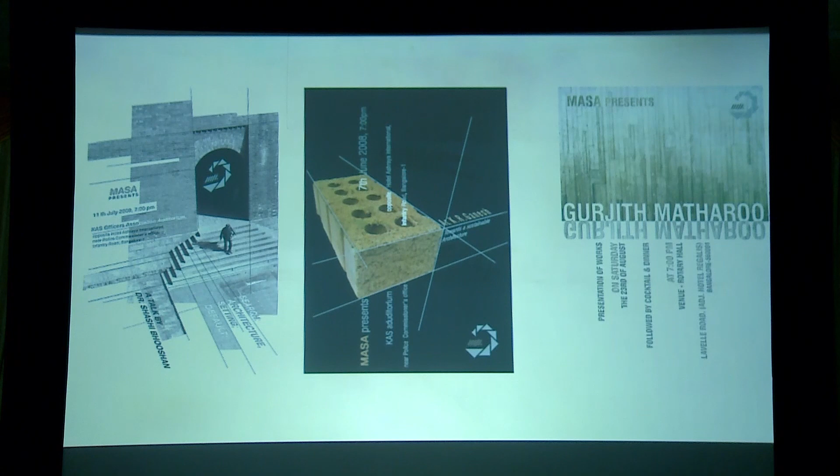Most of the early practices or presentations were from people mostly in and around Bangalore, and some here and there where we could manage to get them from within the country, mostly South India or a little beyond South India.

So these monthly events would then terminate into what was called an annual event. The annual event would have speakers brought from other parts of the country, and that would be a day-long event. So the first one was when we all met, the second one was this.

Then a series of monthly events with speakers, mostly from within the country. As events went by, people from Ahmedabad, Delhi, Bombay, wherever you'd find someone interesting or doing interesting work would be called, and nobody so far has refused. People would change dates at most, saying not this month, next month, but nobody ever said point blank that they wouldn't be able to do it. That led to a series of annual events, and the format kind of got set.

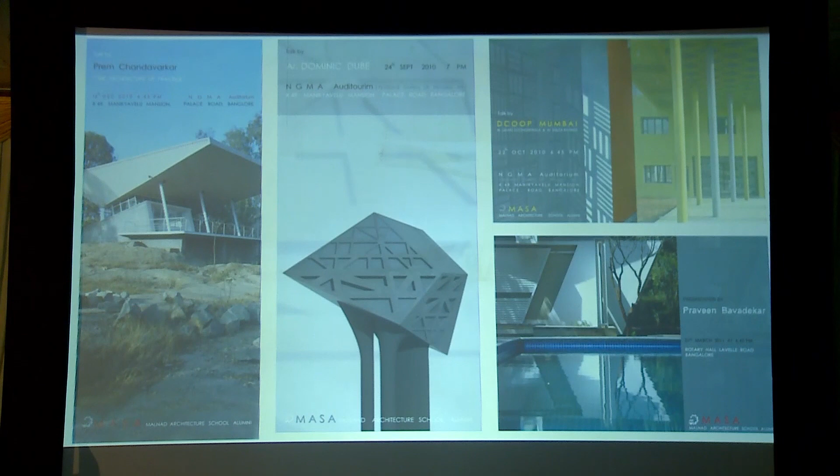You had events which happened every month, and one at the end of the year, September, October mostly, where you'd bring in speakers from around the globe. Slowly we became more adventurous, saying okay, now that we've done events within the country with speakers mostly from the country, can we start hunting for speakers globally? The idea was to start getting speakers from anywhere in the world for the annual event at least, so you'd get the best for the rest of us.

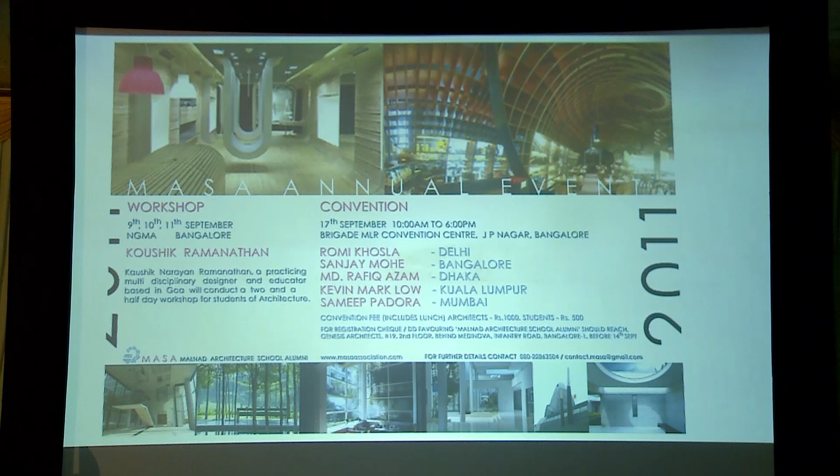This led to getting people from mostly Southeast Asia, because the context was to find people working in similar circumstances, facing similar challenges, having the same weather conditions if you'd call it that, and something which would inspire the rest of us to look at that work and see inspiration in it which would hopefully inform our own practices.

This happened continuously, and some of the speakers we brought were probably introduced to India for the first time. The most interesting part of finding speakers from abroad sounds silly if you look at it now - one would pick these names out of the internet or wherever and just give a cold call. Just write a blank mail to the office saying we are an association, we are doing this, and would you mind coming and presenting? And you won't believe it, most of the speakers have come like that. Nobody has asked for references, nobody has asked if you know somebody who knows somebody. Most of them have come on cold calls, purely randomly picked out of the net, hunted, checked out the kind of work, and then people have come.

For example, Peter Rich, when he first came to Masa, he was visiting India for the first time, and he's not gone back home since. He's still here.

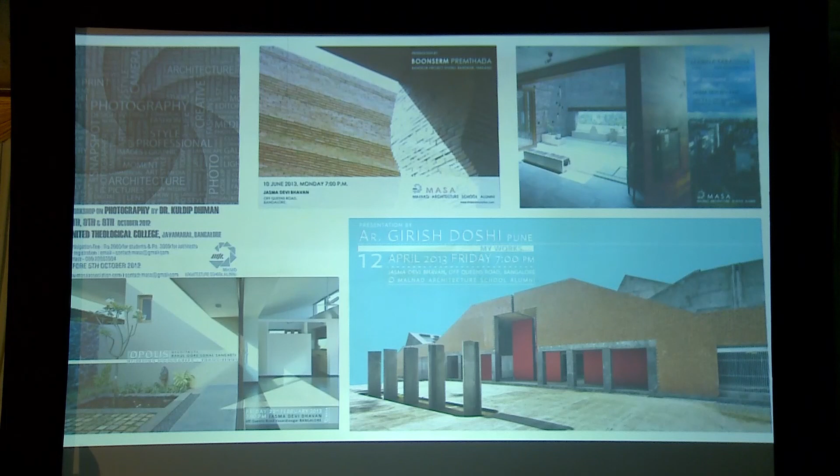People from Spain, from mostly the Middle East, Beirut, Jordan, Amman - countries and practices which have similar challenges like ours, where you work with tight budgets, constraints of programs, constraints of land, and situations which force you to make very difficult decisions, which at the same time produce this amazingly creative work.

Must thank an intern and subsequently an architect who's now running his own practice, a guy called Aziz, who helped doing these wonderful posters and handouts every year, and people would treasure these handouts which would go out every year.

So we did our last event in August 2019, Mona Doctor-Pingel from Auroville, and after that, one of the biggest events which happened during that period was SANAA, one of the Pritzker Prize awardees - I think the only Pritzker Prize awardee who has presented in Bangalore.

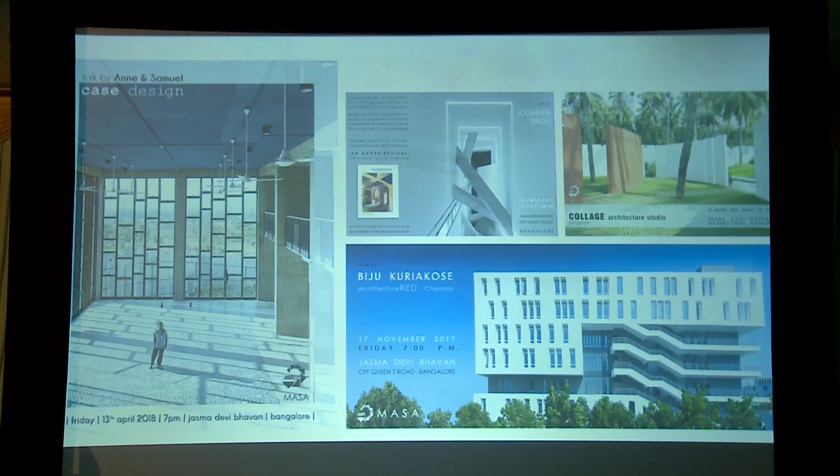Francis D.K. Ching, all of you know from your college days - Form, Space and Order is a book I don't think anybody's ever forgotten. He was somebody we had to pursue quite a bit. It almost took 3-4 years of continuous writing letters to him before he finally agreed to come, and it was a wonderful trip when he finally landed up.

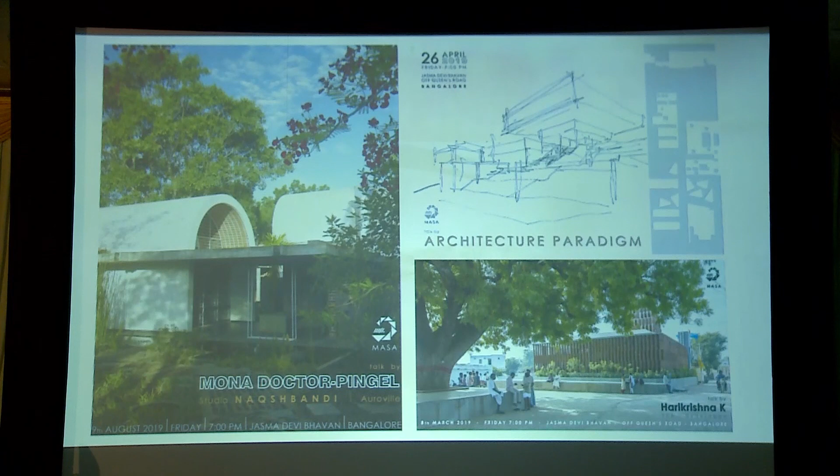This was the last annual event, 2018, and then monthly events followed after that, the last one being Mona Doctor-Pingel. So now, post-COVID and post-Netflix and the rest of it, we'd also like to call it the end of season 1. Season 1 closes with 11 annual events, 90 monthly events, and featuring about 135 speakers from around the world. This is the beginning of season 2.

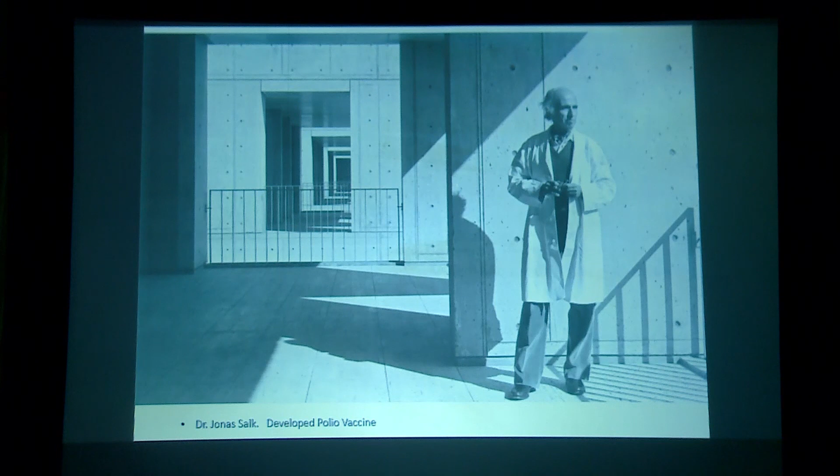Now, this is Dr. Salk, and you all know about the Salk Institute. But I came across this write-up which he had written, what he gave to Louis Kahn. And this is really an amazing write-up. It says: desirability of making a place not only for the scientist, but a place where I would like to invite Picasso, to have the presence of the unmeasurable, which is the realm of an artist. This is the language of a god. Science finds what is already there, but the artist makes what is not there. Now this is quite amazing, and after this, Kahn does this, which all of us know about, and all of us have got inspired by this work.

Now something similar I saw at the Tata Management Center in Pune. We had gone there to see a memorial. Before we did the Anji Reddy Memorial, we went and saw J.R.D. Tata's collection—it's not a memorial, but a collection of his belongings and all.

And there is a huge archive where all the letters written right from Jamshedji Tata and all are preserved there. And there was this photograph, and there was a person who was taking us around. He told a story about it.

He says, when Jamshedji Tata saw iron ore being transported from India to London, to England, he said, if they take away grains, we can grow them back. But if they take iron ore, we lose it forever. So we have to do something to process it here. So the whole idea of putting up a steel plant came with the idea of doing something for the nation. It was not for making money, it was not for making steel, but it was a larger idea to keep steel within the country and then make something valuable out of it.

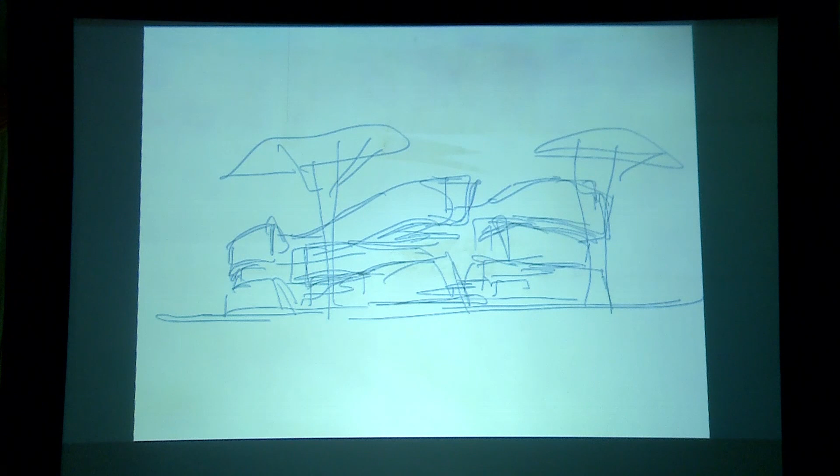And this is just one example, again Titan, of how the doodles turn into something different, then it goes a little further. Then you get into slightly more details, further details, and then a rendered image, and then the actual one. So this is a process which looks quite simple when we put it across, and it looks quite fun, it looks like a lot of fun.

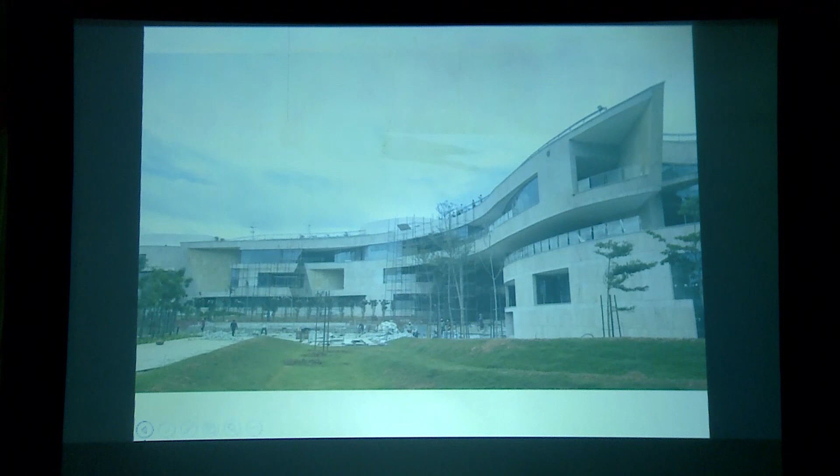But between every two stages, there's a lot of work, there's a lot of struggle. There's a lot of fight between clients, fight between structural designers, between, it's not a fight, but it's working together and trying to achieve that. So this entire process, it doesn't happen only like this, this is just a symbolic thing of showing us in terms of aesthetics. It happens at every level.

You work in plan, and you go through this struggle in the case of every detail. This goes on in every parameter, every level, as you move from abstraction to reality, trying to come as close as possible to what you are dreaming about. This is what happens when you really start coming closer to working drawings. You have this principal idea which you don't want to compromise on, you want to stick to it. But your ability to see through that and see these different layers is what makes the whole process different.

To understand the gravity, you have to understand the structure, you have to understand materiality, you have to understand technology, incorporating all services, statutory rules, economics, etc. There are so many more layers.

When you draw that initial sketch and fall in love with it and don't want to compromise, you still have to remember that a fire tender has to enter the premises, and if you don't make a place for it, your sketch will get rejected even if you work on it till the end. So being aware of all these aspects, working it through, and coming back with something powerful is what we all struggle to achieve. Whether we achieve it or not is a different thing, but at least we dream about it.

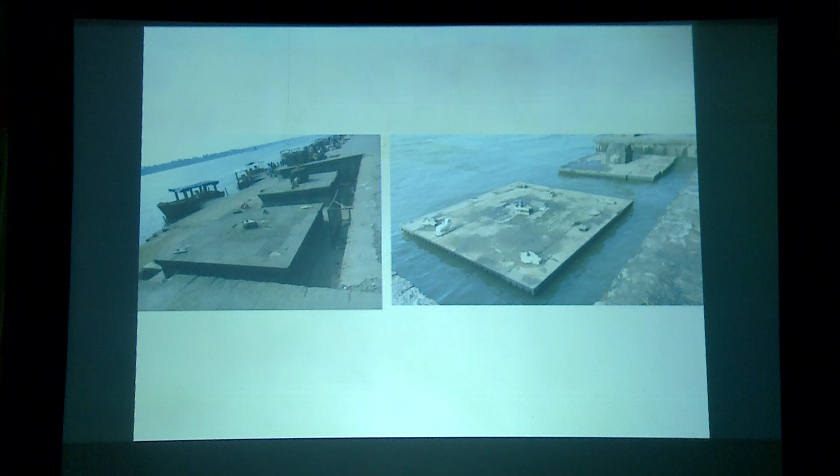And this is how one has to know how architecture has to deal with nature, to be able to absorb and still do something wonderful. And this is what we have to learn, I think. And that idea of dealing with water, this is Geoffrey Bawa's resort.

And here, the water level and the floor level is almost same. And at least for me, it took me so many years to realize the importance of elevating that water level, how important that water level is. If it goes down by 6 inches, it looks totally different.

Now, this is Karunashraya, which we had done long back. Actually, Medappa worked on it. And Medappa has done a wonderful extension to it recently. But just this picture was taken by Claire some time back. But just when the water level lifts up by 6 inches, it makes a difference. And then you start realizing how important it is to deal with it.

So this is one of the houses in Hyderabad where the water level goes below these platforms. But we did this another one where the floor level and water level is almost same. And it has a different quality altogether. So I'm going to show this house.

So this house is, people worked on this is Yatindra and Meera. Interiors were done by Kanan and Kanan Modi, and our Kanan Bangalore has done landscape. So this is next to this memorial what we had done. Actually, this is a house which was there behind that.

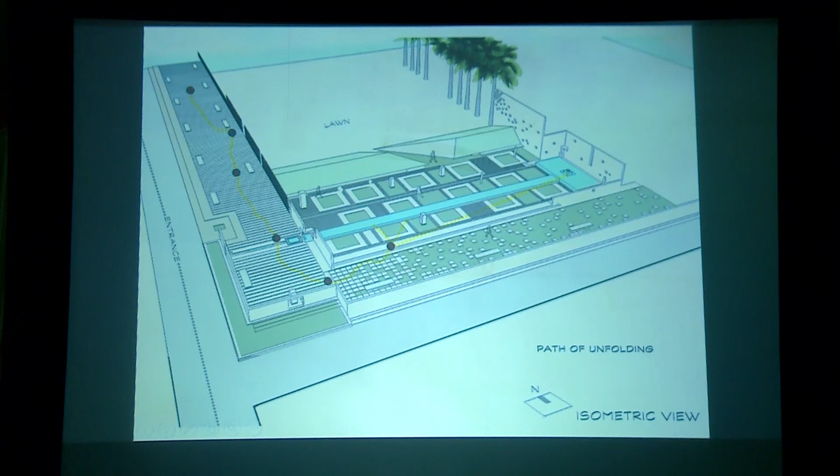Avinash has worked on it. He's sitting here somewhere. So this is what you get a glimpse of, that gap.

Just quickly go through. This is the path that you see, with that variation from rough to semi-rough to smooth to the grass and the tree at the end. That is the bike and the path that he used to take when he was young. That's the water going across. This is that car, which is one of the first cars.

So when young scientists walk on this path, they know that both the ends show what you can do with your life. It's about showing, starting small, taking people along, and then finally this becomes part of these trees, and it becomes part of nature, and then connects with the stars around.

That's a void, maybe a smaller scale compared to what happens in ground zero. But you don't see the base of it, and his philanthropic thing, it gives away, the water flows out of it. Your eye level comes lower, so you just see the sheet of water. That's about giving. That's the path. That's the tree, and this is where. This is the farmhouse, which is just behind that.

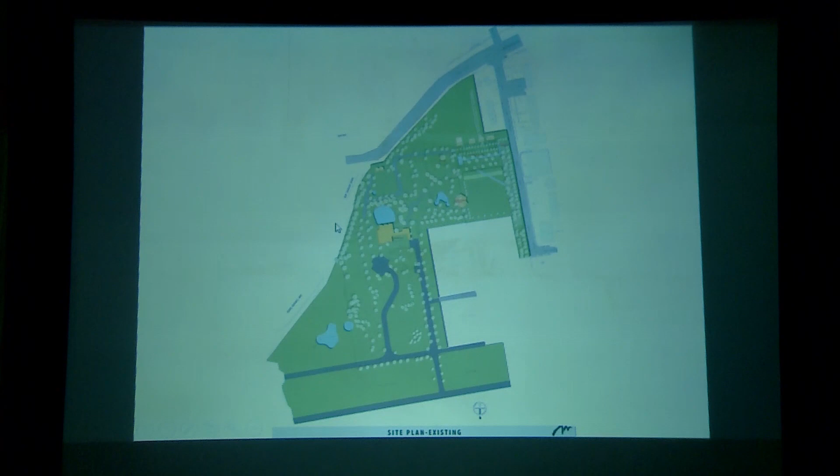So that's the memorial, that's the path which would come, and this is how the front area looks like. There was this cluster of trees we were trying to work with, as you see, there is one very nice kind of dried tree which was almost sculptural. So you have this one large open area here, another large area here. So you drive through this, come into that area, and eventually one can walk to that memorial place.

This was one strong focal point. There were some apartments here, slightly taller structures, so we wanted our entire house to sort of focus towards that to maintain privacy. So that's how you come in from the memorial side. This is how the house sits in, just a series of parallel walls.

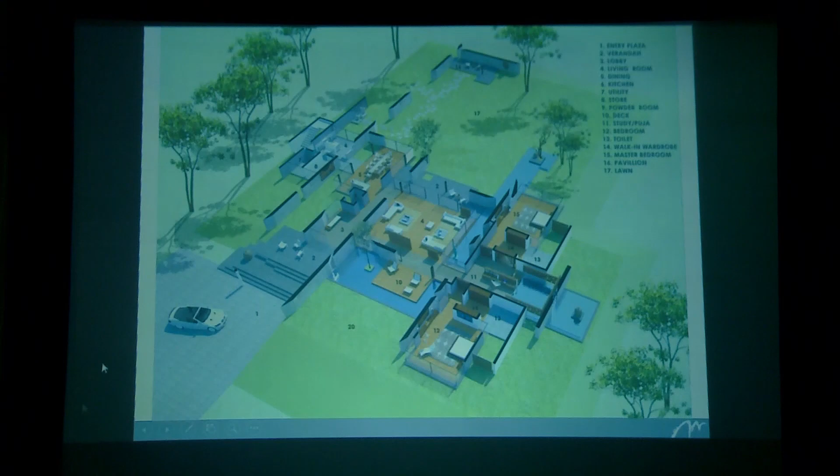Now, all these years we have been always doing houses with multiple levels for some reason. Unless you have a few steps in the house, we never felt comfortable. But this house, there was a requirement right from the beginning that it has to be at one level, and then no double heights, no triple heights, so that was one more challenge.

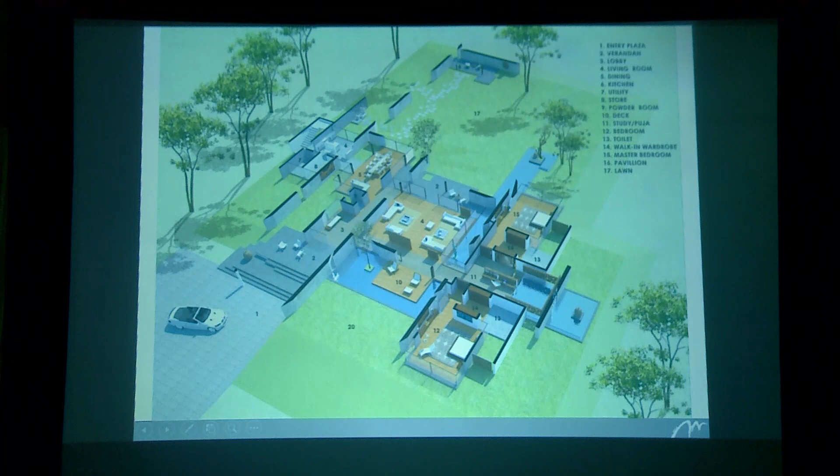We were trying to bring nature into the house, and it had to be air conditioned because Hyderabad is 40 degrees in the summer, so it had to be enclosed. We couldn't create internal courtyards, but we created these layers through which water can come in, nature can come in, and that itself would create a play of light and shade. We wanted that dried tree to become like a sculpture, so that became a spot, but eventually that tree fell down and we had to change that.

So this is how the structure looks like. You walk from there, that's that Bodhi tree. These were a series of sketches earlier, we wanted to get glimpses of it. There was a debate about whether we should use the same stone here or do something different, so a series of slanting walls to basically shade the western sun from coming in. You still get glimpses of it, where the water, when you sit with a book on a chair or a bean bag somewhere here, you'd see that water coming in and get privacy. So what you see, this gap here, that water coming in is just behind that.

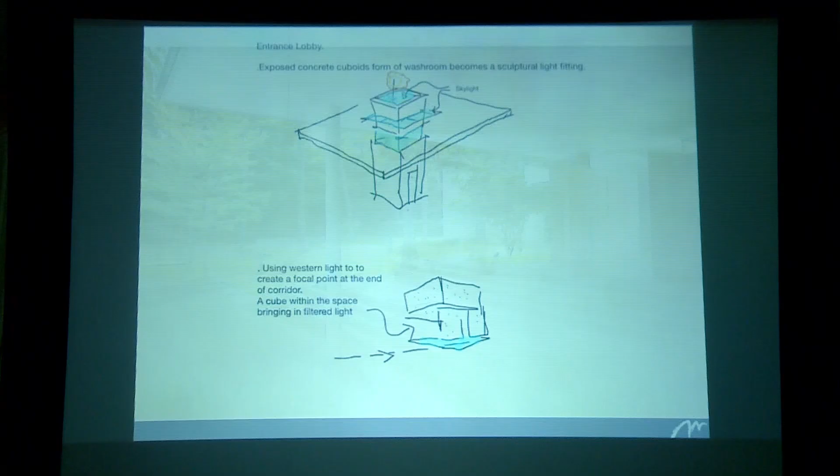The entry sequence, the focal point as a pavilion, so this is how you would enter. There's this powder room next to the reception, so we wanted to create something fun with the light, where we tried to use stone and exposed concrete. These are clusters of trees where your vision automatically moves, and then the way you would take water through these gaps.

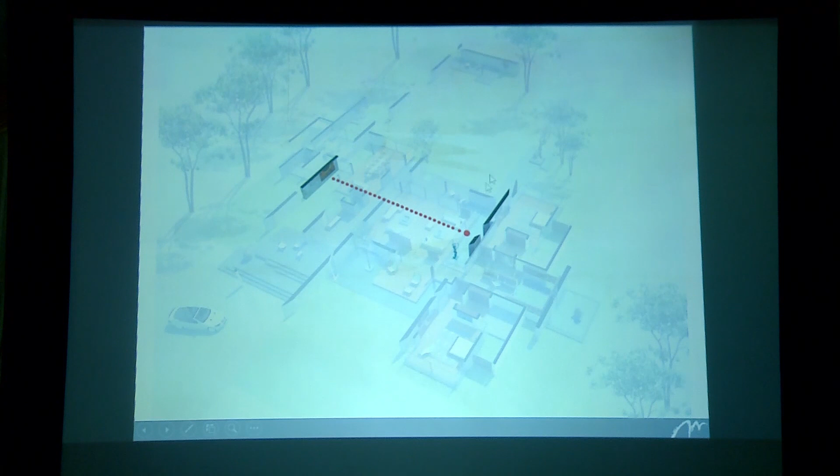This wall goes up to shade the western sun coming into this living room. And then this was a sculpture which Mr. Reddy had, so we just moved it here.

Trying to play with the light, trying to reflect light off certain planes, getting filtered light into it. We're trying to create these gaps in the ceiling which would come down as a slit on the wall, and again as a focal point you see that one slanting gap happening. So you have this series of focal points happening from one end to another, and I think we could only play with those

because there was no volume to play with, which was the language we were more comfortable with. So we had tried a lot of options here. Eventually this is what happened - some filtered light coming through. We wanted to see glimpses of the sculpture, so some openings and a reflected light happen at a lower level.

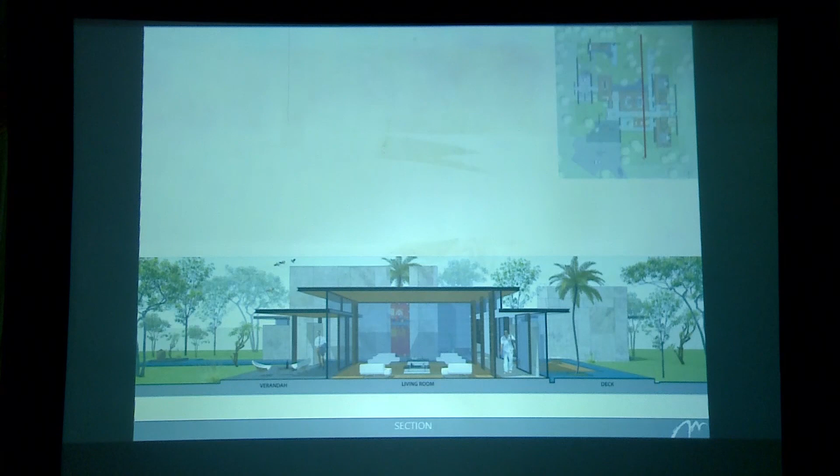The entrance, the other axis, just that black silky finish, stone with 3 different finishes, and then the similar stone used in the memorial but with a different texture, and using a few wooden things. So basically it was like a series of layers, creating different quality of light,

and trapping nature within the space. So Kannan did this landscape, it's very nice. And there's a swimming pool - earlier one had some abstract shape, which we made simpler.

Now this is a second project, in Bangalore, but it's a new campus. I was given some 100 acres of land. Since we were working on this Bangalore campus, they asked us to do one small management development center without affecting the larger thing, because eventually they had a kind of a competition - there was a different process of shortlisting big architects and all that. So that's a different story.

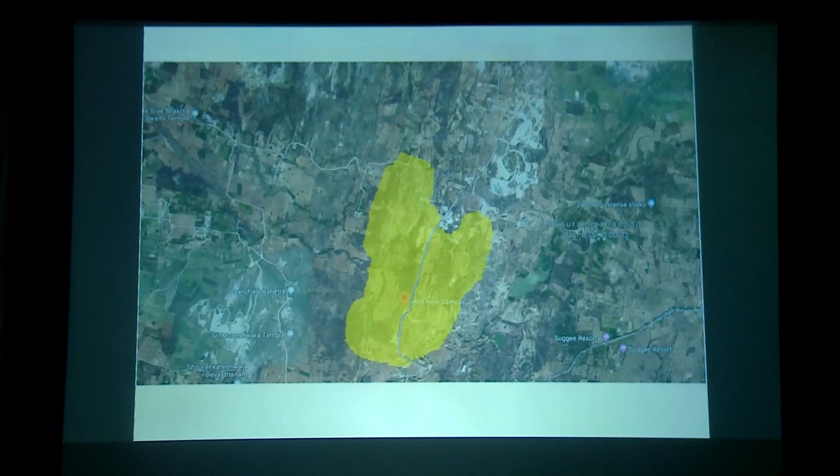Just 1 second, sorry. You can hear, no? Clear. Sorry. It's okay?

So the site has this amazing slope, and actually me and Medappa were in Mizoram about 1.5 months back, and every site is a sloping site there. So we went with our usual presentation - they wanted to see how to build on the slope, because that was the only problem they were facing. Every site was like, if you enter at a place, you have at least 3 floors below that.

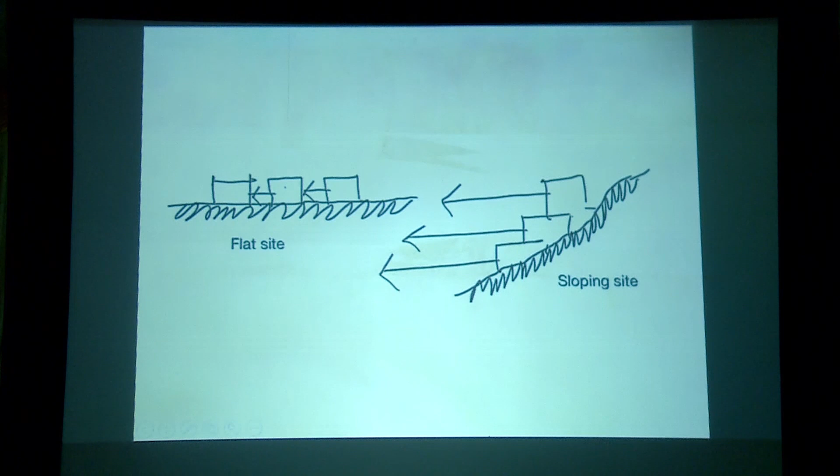So this presentation we had not taken there, but if you just compare a flat site against a sloping site, it has this tremendous advantage of lifting your eye level, so you can get a view right up to the horizon. You have access to the terrace of the lower person, so that's a huge advantage, and then you have access to the ground. So even if you are building 3, 4, or 5 floors, each floor is like a ground level - so in case of fire escape staircase, you really don't need it, because you can access ground from every level.

So there are tremendous advantages, though there are a lot of disadvantages in terms of dealing with waterproofing and how to build retaining walls, etc. But it's great fun.

So these are some examples of building on the slope, where traditionally people have exploited this in a very different way. I just want to show these 2 different types which we have dealt with. One is you have a sloping site, but you sort of sit lightly onto it - keep it more transparent at a lower level, don't touch the ground, and have some minimal connections. The second is you firmly sit on the ground, anchor it to the base, and make use of the ground as much as possible. So we have done both these things.

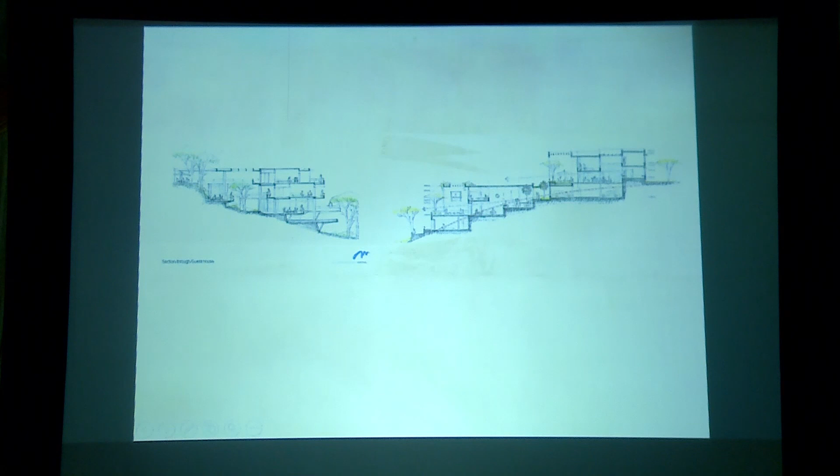So I'll just quickly go through it. Just to connect, Geoffrey Bawa's Kandalama is more like this - it doesn't touch the hill, it sits very lightly on the ground. So in this project, there were a lot of these rocks, in Hyderabad.

I've shown this many times, but this was a sketch I did on the back of a greeting card. Then I did this section coming back to the office, added all these levels, and it all fitted in pretty well.

This is how the plan sort of worked. And this is how the building looked with water bodies, bridges, rocks, and how the trees grew over some 4 or 5 years. The rocks that looked so barren initially are all full of trees now, and you have connections where from your room you can go across and get onto these rocks.

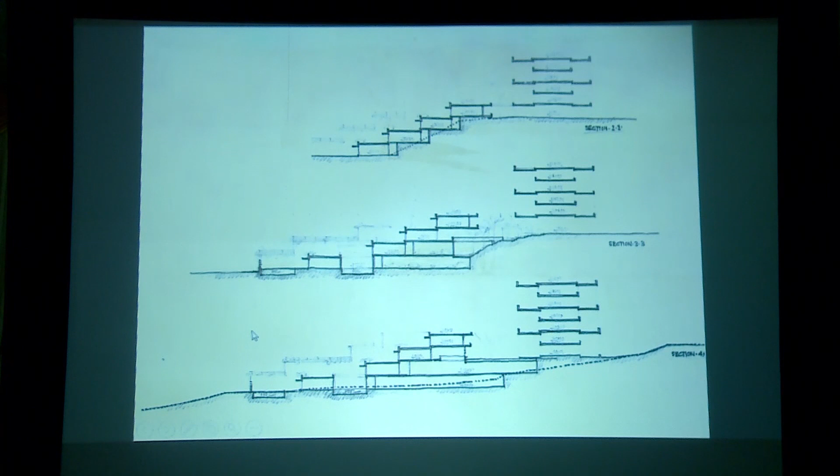This was another site in Kerala, one of the most wonderful sites, and this is from the top. We started working on these villas-cum-apartments, and these were the sections. Each section deals with the way the slope of the site changes - when it becomes shallower the section responds differently, and when it becomes steeper it responds differently. Then there are some apartments further up exploiting the view of the water.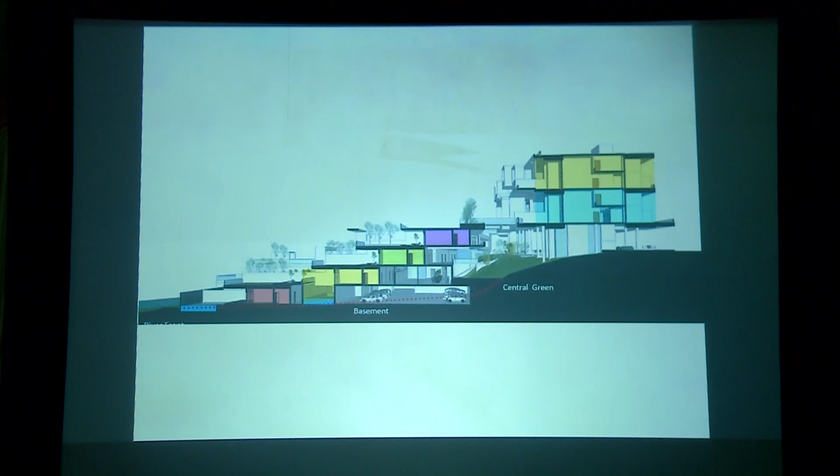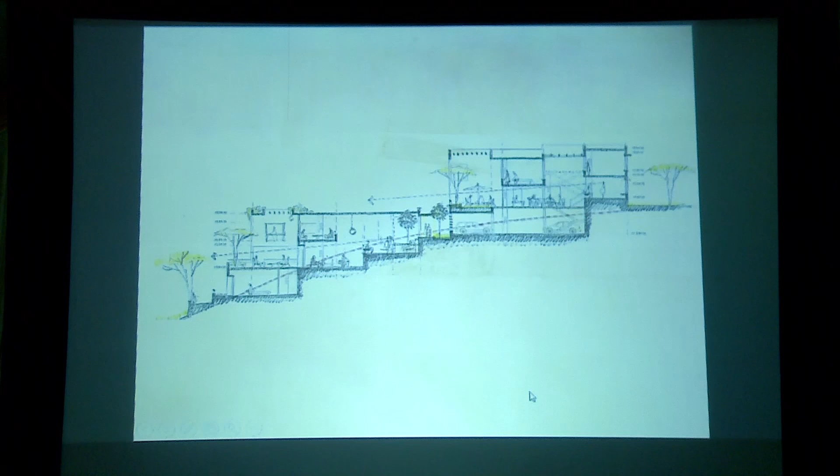And quickly, one more project in Pune called Madhuban, again sitting very close to the ground. This is the ground level - the lower unit and upper unit with car parking in between. That in-between space, at its narrowest, is probably about 10 feet, but becomes quite huge in the middle, incorporating even a swimming pool. So that middle part varies, and the lower and upper units are totally different.

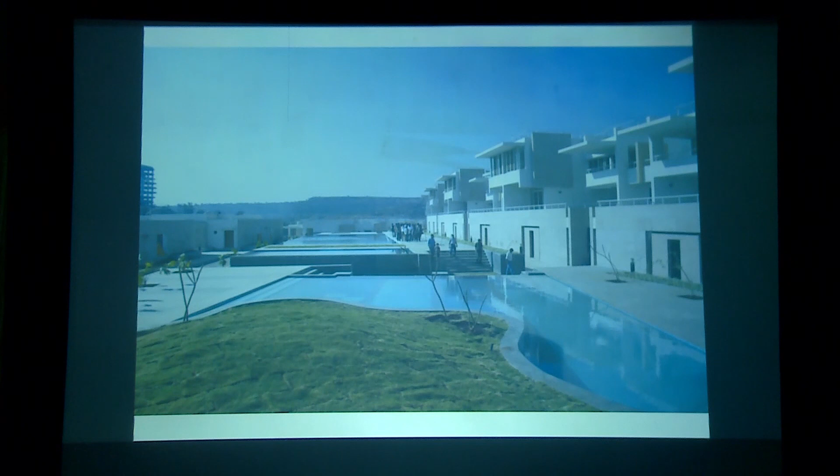I get very disturbed by what's happening in Bangalore now - you see huge towers sitting on these rolling terrains of sloping hills, and you feel like some alien ship landed onto it. If you can build something close to what we saw in those Greek villages, or even in Mizoram, it eventually still looks like a hill - not some alien structure stuck on.

So this was the idea, and this is the house. If you enter at the highest level and keep going down using different paths, from every level you have access to the ground, so you get a small patch of garden at every level wherever you are.

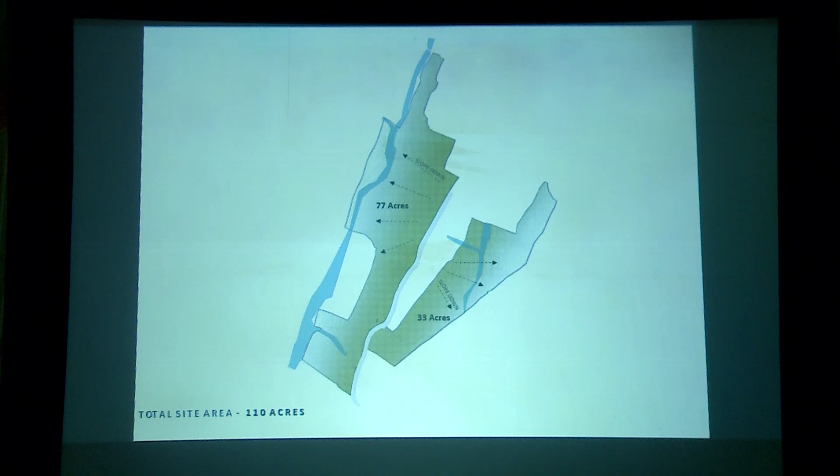These were the studies and references for us while doing it. So this is that 77 acres and 33 acres site. We wanted to place this in such a way that it doesn't affect the master plan in future, yet has access from the road. If you look at the site section - it may not be very clear - but that's the slope, and that's the water below. What we're building is one tiny thing here, with the road on top.

So this is where the main campus is going to come, and there are some architects already working on it. So these were the first sketches. How would you respond to it?

This is a typical situation where you put these three. The management center is somewhere where it's almost like a hotel with classrooms attached to it. So you stay there for anywhere from 1 week to 3 weeks, studying in the classroom, and discussions continue over dinner, over lunch, and things like that. Most of the CEOs of companies enroll themselves in this program.

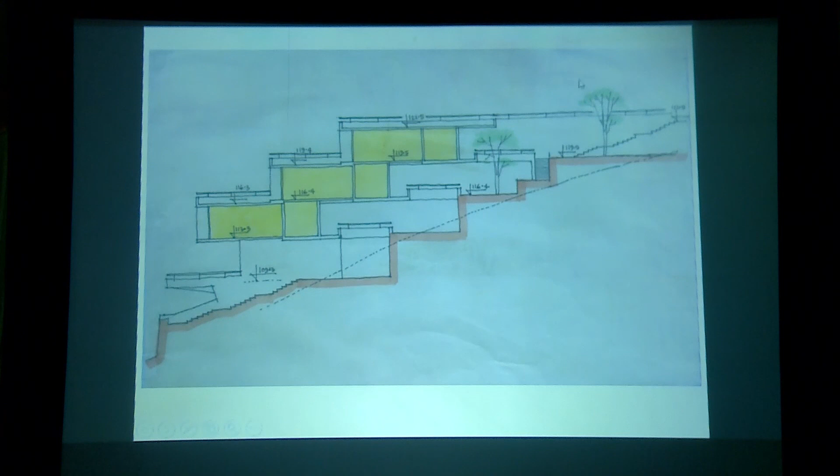This is a typical section which created this variation. If you move that same section and trap some space in between, separate the ground, and then connect it, you allow light to come in and start creating interesting spaces. Then you start deleting certain rooms and creating extra volumes. As a basic format it's very simple, but the moment you start playing with it, you can get amazing spaces.

So based on that, we worked on it. This is the lowest level. Whenever you have to deal with lifts and such, it has to go back, so you end up excavating a little more. But otherwise, it's almost a cutting half, filling half kind of situation.

As you go up—I think I missed out the team who worked on it: Arun, Uday, then Dhanush—these are the people who worked on it.

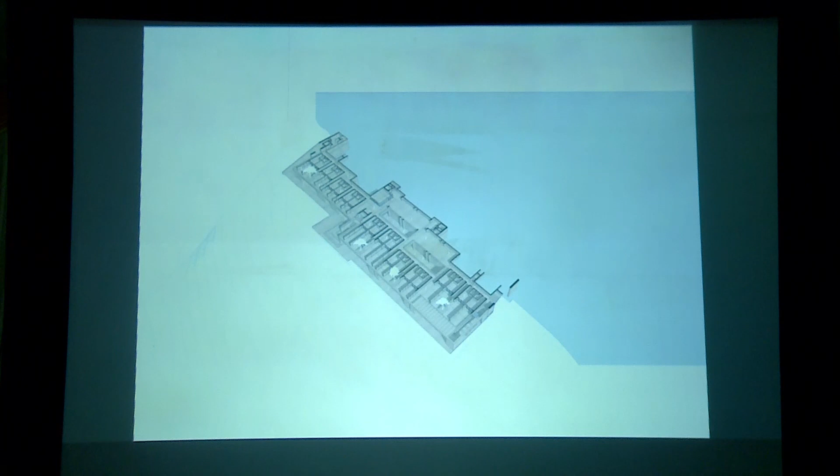So these are the different levels till you come to the road level, and these are the upper levels, and these are the sections. In Mindspace, we love doing these kinds of sections, and we keep rendering them and enjoying them. If you look at these sections, you see that variation happening, what I was explaining.

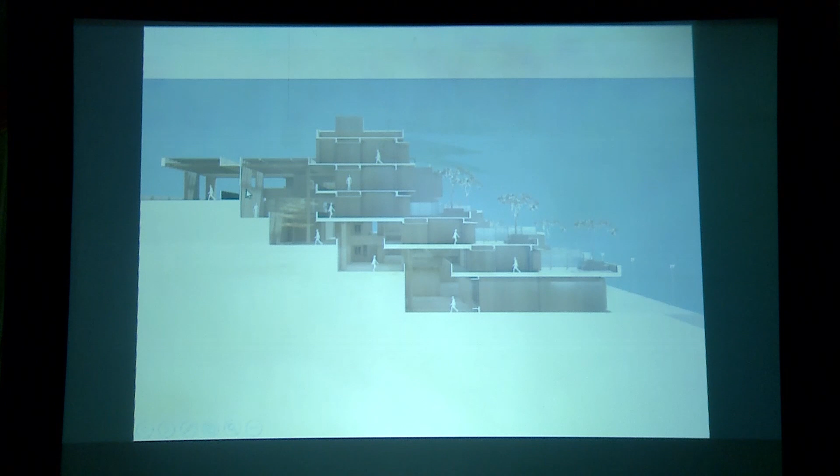It's a simple, basic module, but it keeps getting variations as you work with the staircase, which goes from one end to another. You have to position the units in such a way that you have access to the corridors within that length, and also access to the terrace. The lowest level is dining and classrooms, administration, etc. And in the other direction, again a similar thing happens.

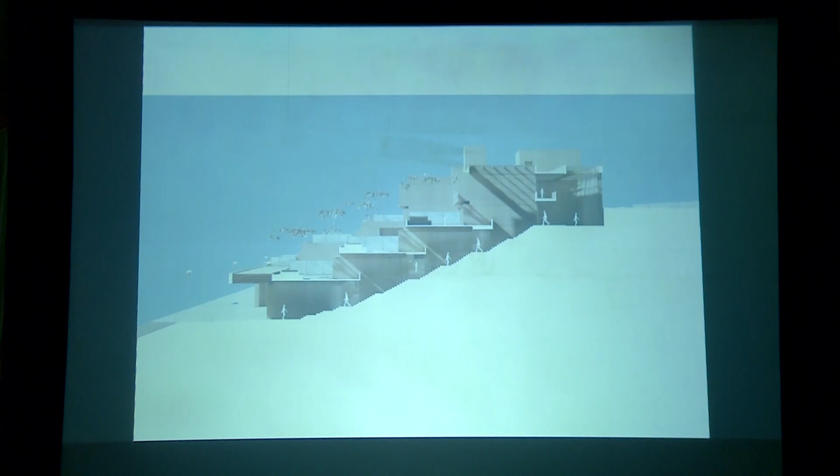This is how it overall sits onto the ground. This is where you come in. It looks like almost a ground-storied or ground-plus-one storied structure from the road level, but when you come in you get this amazing view. The Bannerghatta Park is just behind this hill. The only disadvantage is it faces the western side, but you get this amazing view and see the sunset as well. So you have this grand staircase which takes you down almost to the lowest level.

All exposed concrete, lots of detailing. Arun has spent a lot of time mastering this technique—he knows every bolt, where to put it, how to hold it. And then you can make out the section, the way it sort of goes in, the quality of light.

These are the different—so these become wind tunnels, which I learned from Correa's Kovalam Beach Resort when we did an extension to that. You get amazing breeze when you create these small gaps—not just the light but the breeze as well.

This is how every room looks like—it's still happening. And that's Arun standing there, admiring his work. The staircase going all the way down, and from the upper level looking out onto the road at the entrance.

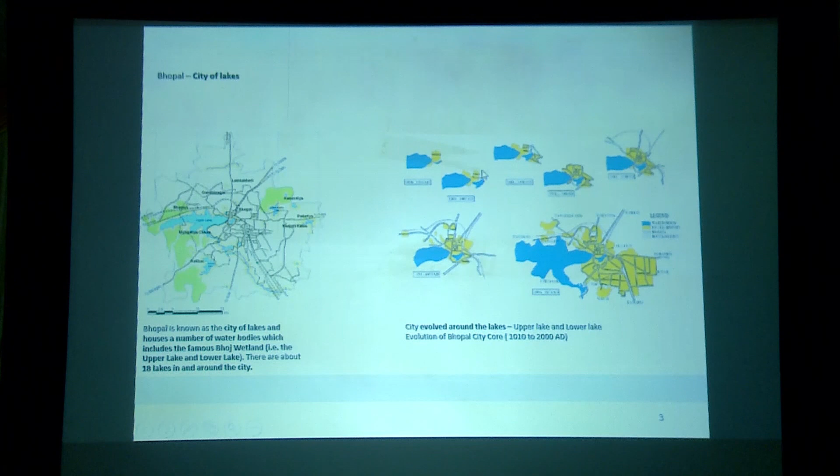So we started looking at Bhopal as a city and how it grew. It started as a very small thing, with this Chota Talab, Bada Talab and all that, and slowly the city grew, from old city it became new city. But if you have been to Bhopal, you are always aware of this lake. A lot of roads, the lakes are not hidden, they are all part of the city life, and you drive along that, which is a nice thing. So you are always aware of the presence.

And Correa's Bharat Bhavan again sits next to the lake. So always while driving through, you are searching for where Bharat Bhavan is and all that. So our site is about 20 kilometers from the airport.

There are a lot of historical references, and there's this place called Gauhar Mahal, which we went and saw. We went during this hot summer, almost 40 to 45 degrees outside. Luckily we went with a client, and when we went inside, it was very cool - noticeably almost 5-6 degrees cooler. You could actually feel the difference.

And then we started analyzing the sections. That was the huge kind of benefit, because clients also experienced that difference. And then they supported us through the whole process of achieving these kind of terraces which overlook the court, allowing the breeze to go through - a lot of terraces which would sort of allow you to exploit the breeze coming in. So that's what you would see, typically a lot of terraces.

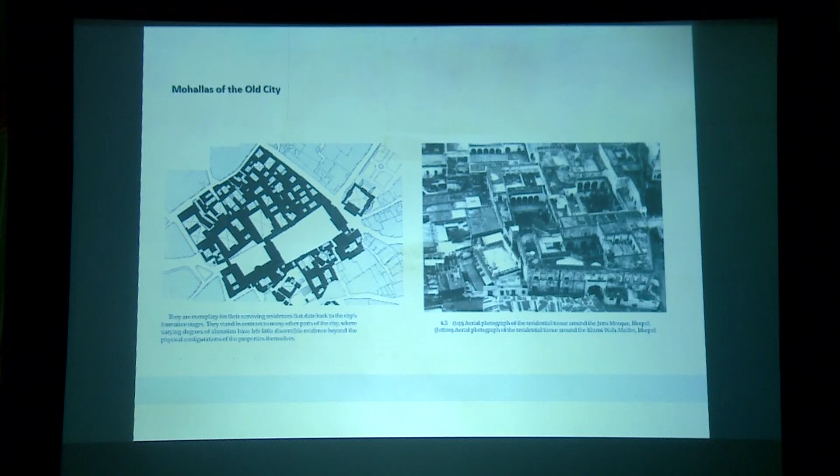If you see any of these old Bhopal Havelis, you will see a lot of these terraces happening across. Even the mohallas, maybe similar to Ahmedabad, have these shaded streets, so you try to preserve that cool air in those pockets and keep it cool. It's a place of a series of gateways, so you keep seeing that, similar to what happens in Mysore. You are always aware of these gateways.

And the huge thing is the Sanchi Stupa, because the moment you get out of the airport, you will just see those symbols and gateways of the stupa everywhere. You are kind of aware of it. And the way this whole place has aged over, I think from some 200 or 300 BC to now, these stones look so fresh and so lovely.

There are some prehistoric caves which are also nearby, and you get this beautiful material. Actually, we just accidentally came across this - we were driving through the city just to find out what kind of material you'll get. We stopped for tea and then went across and saw these kind of slabs lying around. We went into that house and asked him, and he happened to be one of these stone suppliers. He said, I will take you to the quarry. And then we started working with this.

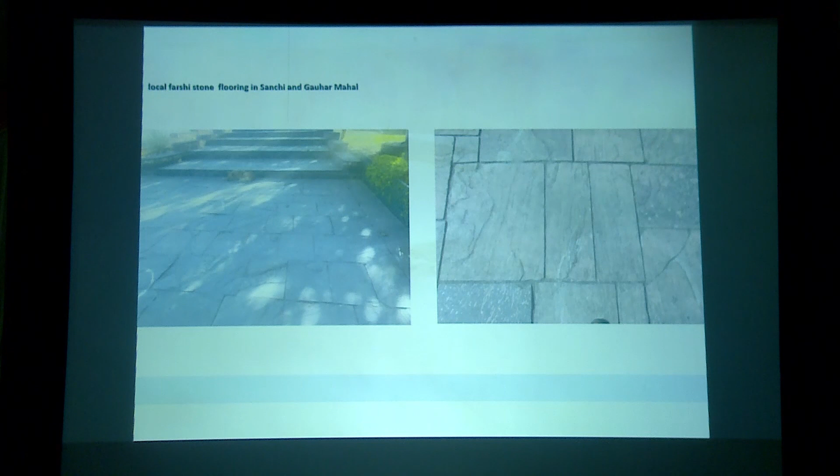This is actually similar to the Sira stone you get - 30mm thick slabs, even thinner than that. When you use it as cobbles, it becomes like cobblestone, they call it farshi. So this is that farshi stone. This is in the stupa, the way it has aged over there. And this is what Correa has done at Bharat Bhavan, using the same stone. I don't know, for some reason, local people don't use it.

I don't know why, but it has such lovely color and such good aging quality. I just don't understand why they are not using it. There are a lot of these references close by.

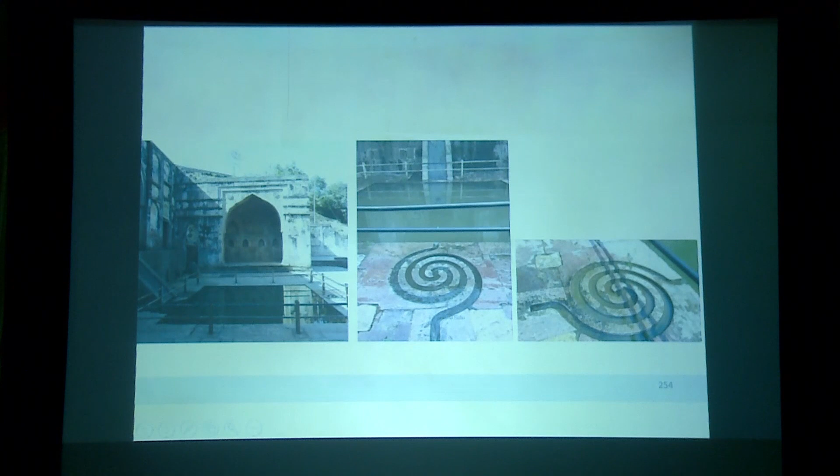Mandu, where they mastered the use of water - storing water, exploiting water, celebrating water. This is the famous Nilakanta Mahadev Mandir, where water comes from the hill, goes into the temple, does that abhishek, and goes out, creating patterns as it flows. This is Maheshwar, which I showed earlier, and the way they played with light in this hammam and the baths in Mandu. So that's the site.

Now this corner is about 8.5 acres. This entire length is about 1 kilometer, which is absolutely huge. So coming to terms with this, the scale was a little difficult. There was a nala skirting the site.

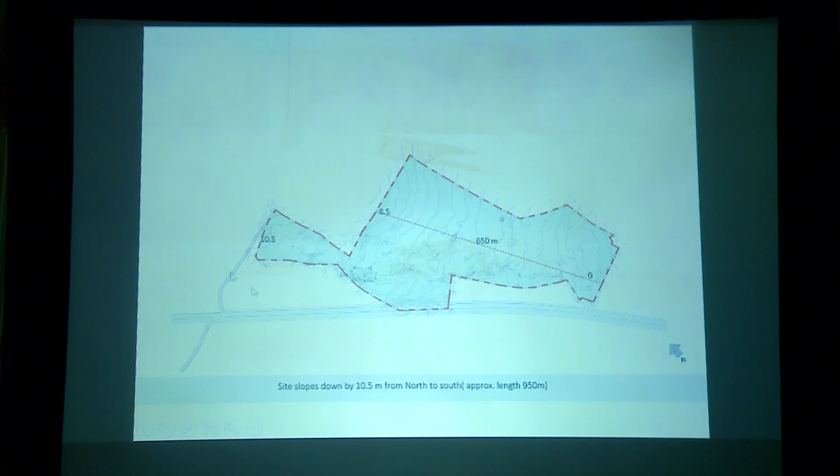So we had to leave buffer space along that edge. There was a drop of about 8.5 meters - to that scale of 650 it's really not much, but it allows you to take the services, especially the sewage, down. Actually, there's a road called Kalpana Chawla Road in front of our office, about 700 meters, so we were gauging this length, which takes about 10 minutes to walk across.

There was this road widening happening, and the setbacks. We had a meeting with the entire team of Azim Premji Foundation. They are very, very nice, very enlightened people, very knowledgeable, ready to talk about ideas. We sat with about 20-25 of them and asked each one about their views and vision about how the campus should be.

Each one came up with some fantastic ideas, and we noted it down - with each person's name, not in terms of hierarchy of position, but everyone spoke. Everyone came up with some wonderful ideas, which we tried to put together and synthesize.

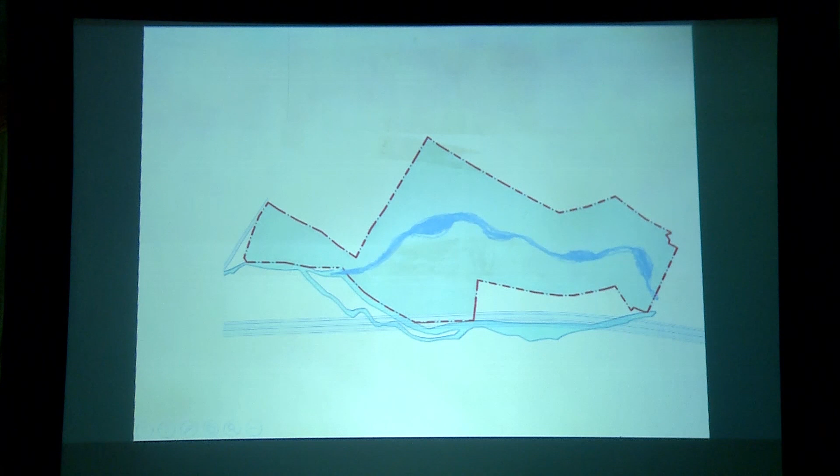One idea was that this water, which would come only during the rainy season, probably about 2 to 3 months in a year, we would direct it through the center. That's how we started working on it.

One of their ideas was: can certain spaces be shared by the community? So one of the things was a playground, and the first idea was, can the playground be shared by the entire community? We started working with that as an idea.

Playground close to the outer road, then academic block here, residential block here, and members' apartments, which are the teachers' apartments, and the fast track project, which had to be completed within a very short time - probably a year's time. So that had a different kind of requirement. This was one idea.

The second idea was there was one small entry here. So can we put a playground here, and then hostel block here, academic block here, and members' apartments here - you'd have that whole street unfolding through it, eventually meeting the fast track project, which is again a smaller academic block.

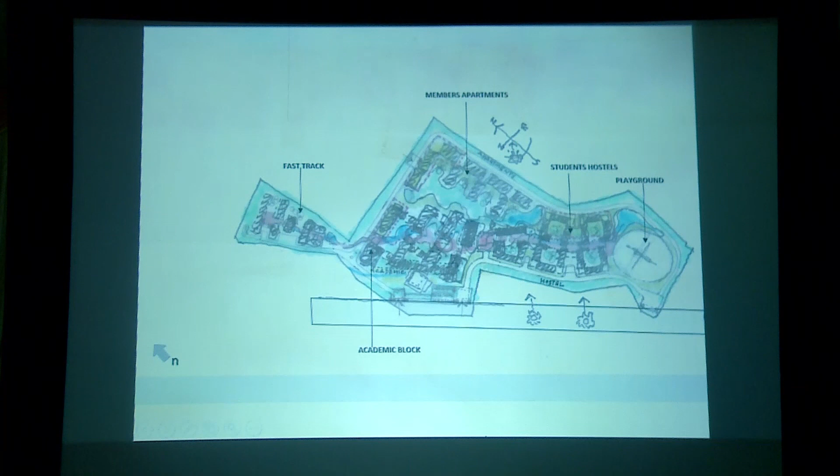This was like a street which we actually liked a lot, but they didn't like it. They felt that the apartments should have their own independent entrance, because they will get visitors and there will be a security issue in dealing with that.

So eventually this is what happened - you have apartments here, students' hostel here, and academic block here, still trying to create that unfolding pathway with the fast track on the other side. So we started working on that.

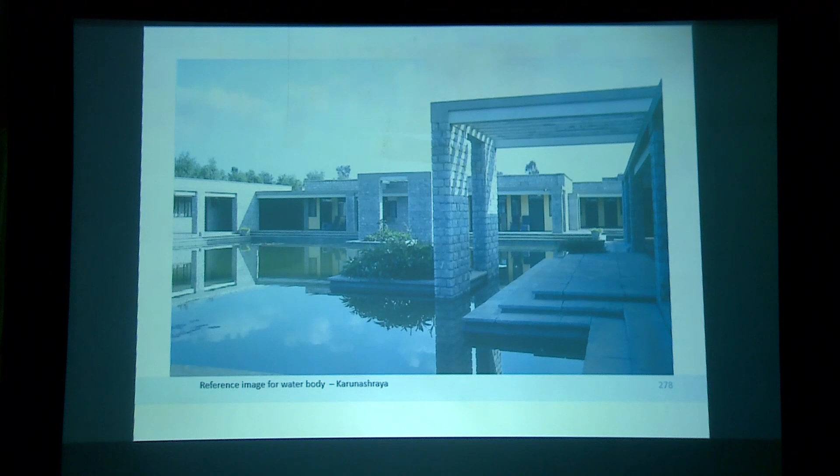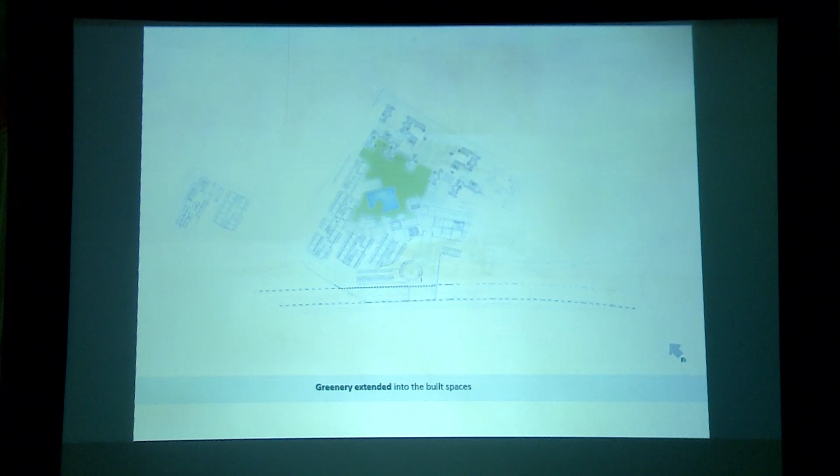This is Karunashraya, which I showed earlier - we wanted to create that water court in the middle. This is in Trichy, which is the CARE campus. Again it has this large water body in the middle, and the same place gets converted into a large gathering space when you have a function.

These were just initial sketches done during Corona time. So this is the water body, and this is the CARE campus. Just to get an idea of scale, we took what we had already done and put it to the same scale to get a feel of it. These were the different sections and the whole path going through the entire site.

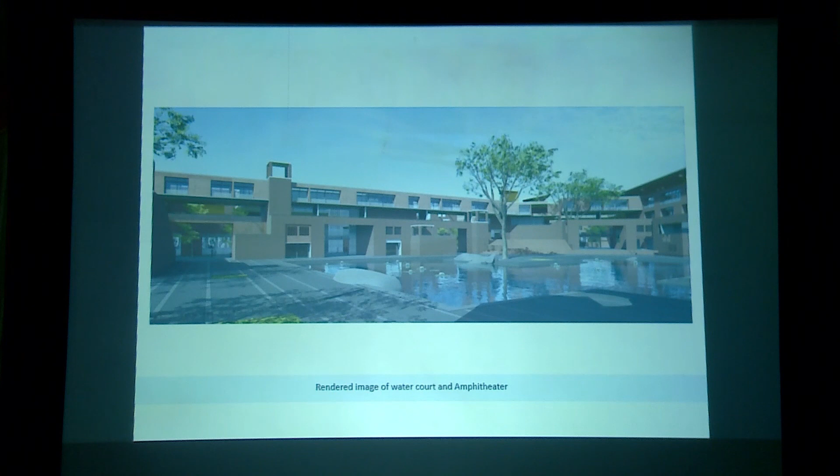Lot of small scale sections, and then we're talking about connection with water, like that Maheshwar kind of a section, and you would have these amphitheaters sitting next to the water, and it would be used for so many other things.

One of the important decisions we took is we'll start planting these trees across the campus. This would almost be a 1 kilometer walk. And if you start planting it immediately, you would get an image like this.

I showed this image to the clients and said there must be somebody 100 years back who planted these small saplings here and imagined that it would become like that after 100 years. That's what each one of us have to do. So if you want to really create a space like this, you can't expect it to happen immediately, but plant today, it will happen after 25 years. Maybe the next generation would enjoy it.

So we started with that as a main axis across, which also becomes a path for fire tender movement. Nowadays you can create this base with pavers where what you see is only grass, you don't see those pavers. So it would be like a grass pedestrian pathway.

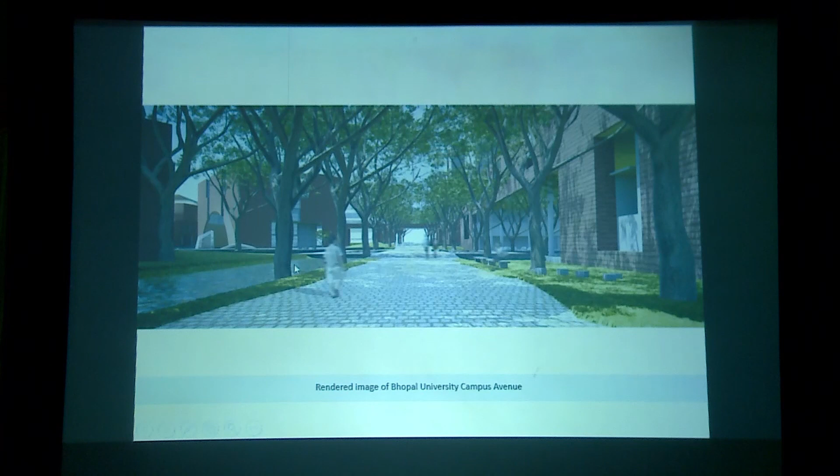In the case of emergency, fire or ambulance, it would be used for that. Actually, we've created that waterway, what I showed, next to this path. So this water will be there only maybe for a very short time. Rest of the year, it might look like this.

But a beautiful thing about these pebbles is it reminds you of water. So even if there is no water, you would still imagine water to be there. So we would create these swales along that path.

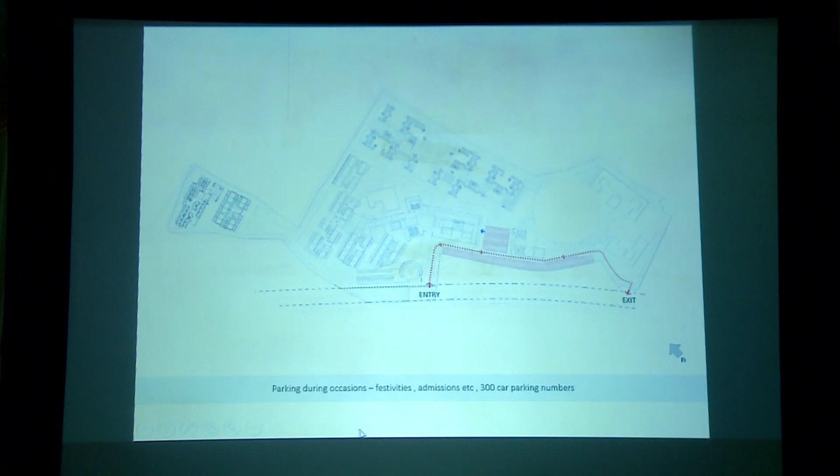The way the circulation would happen, vehicular movement, the visitors who stay outside the campus. When it comes to large events, some function happening, extra cars would come, that time you would use this. Or when there is admission, a lot of parents come with their vehicles, so during that time. That's the entry to the hostel. The vehicular movement on the periphery, the pedestrian movement through the middle, as well as the emergency vehicles.

We sort of looked at the temperature across the site. It's 3 months hotter than Bangalore, and that time it gets hot, going to about 40 to 45 degrees. But luckily that happens in April, May, June, which is a holiday time for the college.

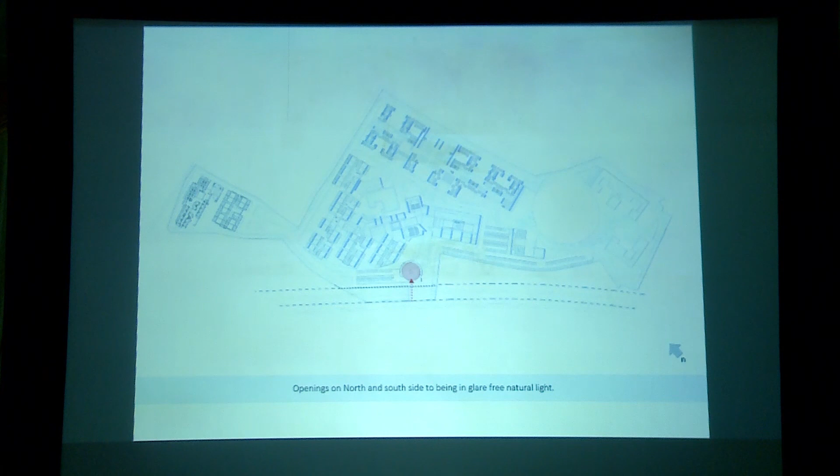So we really don't have to deal with that extreme temperature, but still we would work without air conditioning the campus. So orientation became important, all north-south orientation. The western walls became more blank, western and to some extent, so that's the buffer. So these were examples of how to protect it from shading.

I always walk during the afternoon after lunch, and always found that the northeast side of the building always has shade. So we were trying to create this northeast shade, so when they walk during that real hot time, they would get that shade happening.

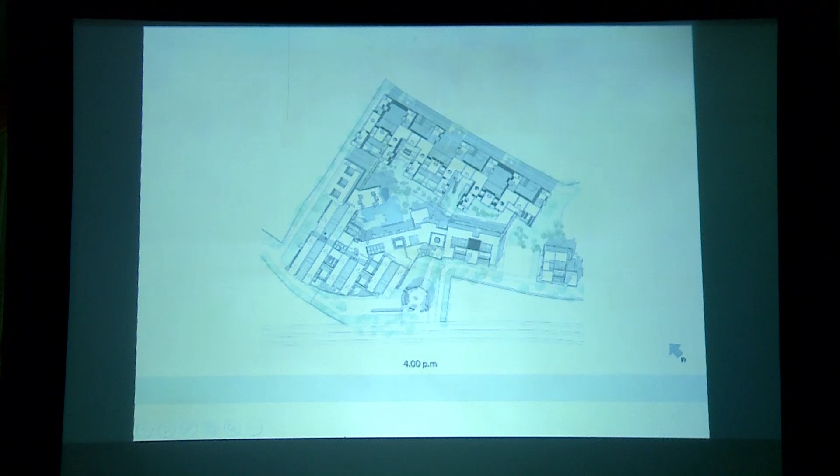The wind is predominantly from the western side, so we were trying, by default we got this, because we oriented north-south, we got this wind coming from the western side as wind tunnels.

We started with a module of a classroom, which we've done in several projects - classroom with courtyards on either side. But here they were very sensitive to sound transmission, acoustics, and things like that.

There's a video I had seen which said that architects don't design through ears, they only design through eyes. So we are never sensitive to how the sound comes. But in a classroom, if a person sitting on the last bench can hear a crisp sound of clear quality, he or she won't sleep. So it's important to have that quality.

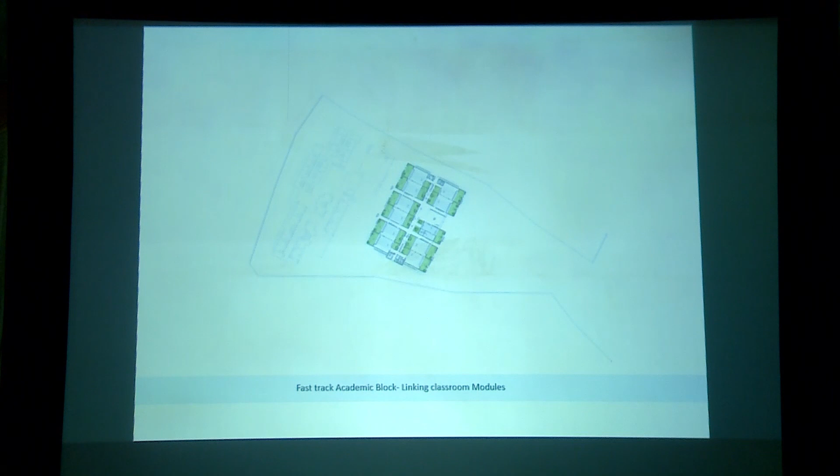So we worked with a lot of acoustical engineers, a lot of input came from there. So that's the first module which we took.

Using these stone slabs, we created a lot of options for how we can use them - whether as a fin, as a Bharat Bhavan kind of situation, or as these chajjas creating nice shade. We had to work against time, this fast track had to be completed within a span of about one year, so the whole team really stressed in terms of working, and we used this stone.

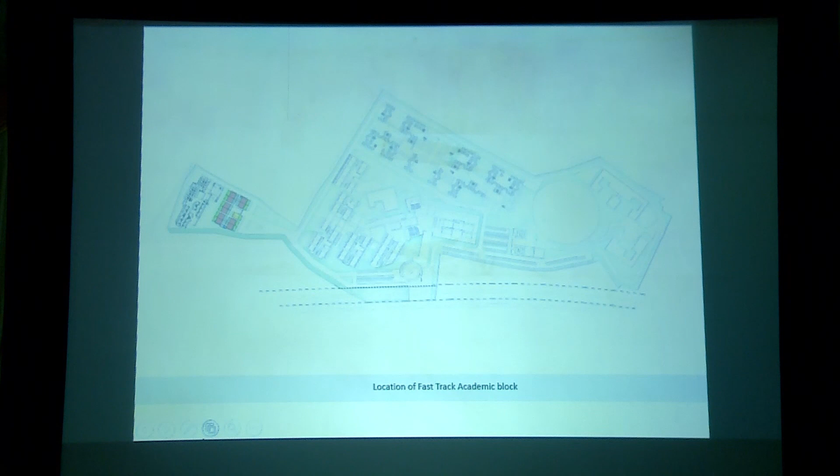So we started working with that module, modifying it in different ways. Then the library came as a center because they want the library to be open even during the night, and with boys and girls staying there, if they want to walk across a long distance, we wanted to minimize that. We have some bridges from the podium at the second floor, where from the hostel you can go directly into the library. So the library became like the soul of the whole project, the actual hub.

And then you have this large water body next to the library that goes through. These are all seminar halls, and more of the crowd gathering kind of places - auditorium, seminar halls, workshops, etc.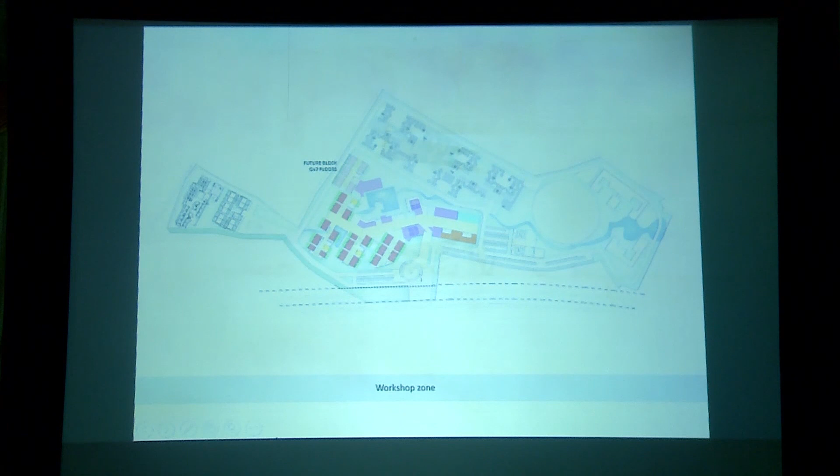We created this main axis - I'll come to the rotunda at the end, but that is the entry point. We've created this axis, and we wanted some flowering trees like in Bangalore you get tabebuias, during certain months that entire Cubbon Park becomes pink flowers, at least some of the roads, and you remember that as an element. In Bhopal you can't get tabebuias, they won't do well, but there are equivalent trees which we managed - Kanan has managed to locate some of them which we would plant around. They will flower probably only during 2 months, but when you go back and look after 25 years, you will remember those trees.

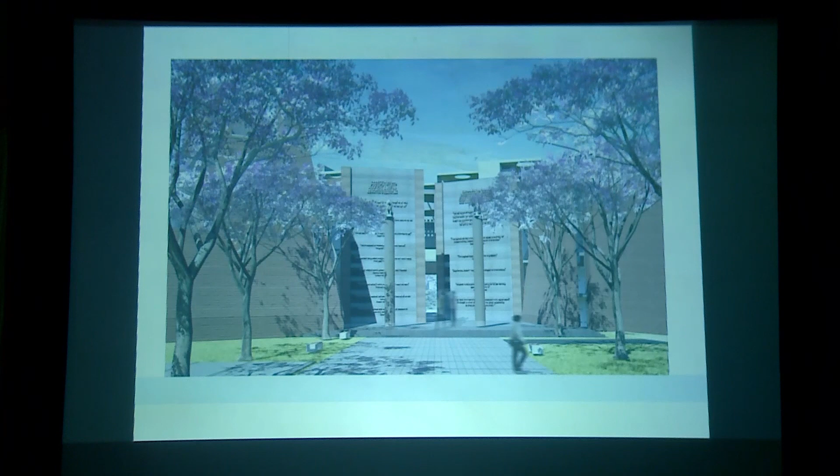So this is what we are imagining it to be. Then you come in, and it's like a huge gateway which opens and creates an entry for you. There's a small gap through which you see the axis going across - actually it's a larger gap, but from the entry point we intentionally wanted to see only about a meter or a meter and a half kind of thing, where you see that extension.

These are some of the elements from the stupa. Again, there are these edicts of Ashoka, and right from Pali language to Sanskrit to various languages, you will have these quotes which would be put up. And then you have references from Sanchi - we have these gateways, so that became a gateway.

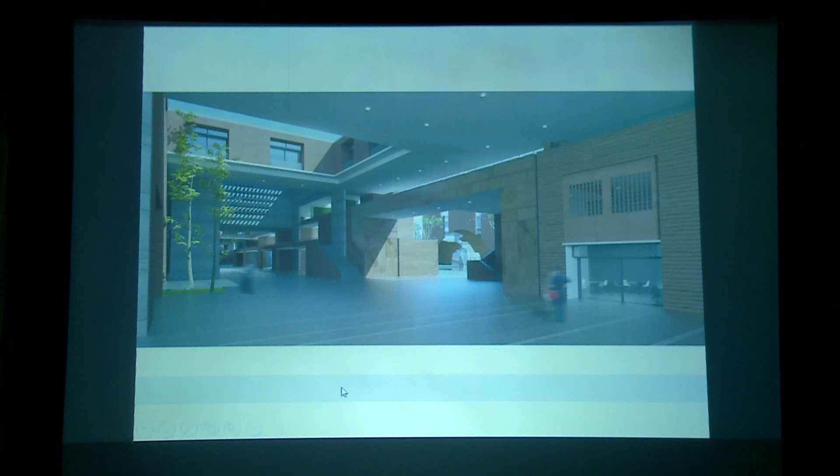So you have one axis which goes towards this, another axis goes towards the library. And we found this nice statement: the person who looks outward dreams, the person who looks inward awakens. We wanted to have both these things - this is about climbing up, reaching high goals. This path goes up as you enter into the entrance lobby, so you see this one axis which climbs up to the podium of the hostel, almost symbolic of the stupa. Then there's another axis which goes towards the library, and this is looking inwards - it's more of a meditative space. This is the stupa diameter, connecting 4 cardinal points, symbolically trying to anchor it into a center.

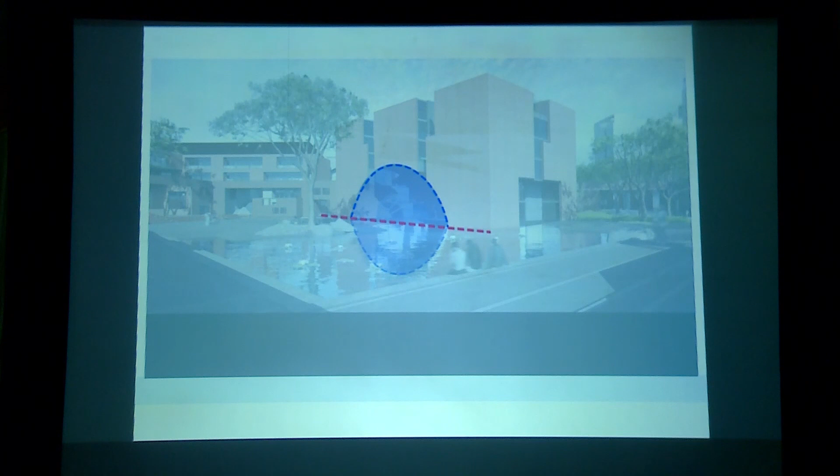It seems somebody had asked Louis Kahn, why didn't you plaster Ahmedabad IIM? And he said, education is an incomplete process, and I wanted to symbolize that incompleteness in architecture as well - it's an incomplete process. In this case, in a different way, we wanted to make it complete by completing that circle. So you have this semicircle which gets reflected in the water and becomes a complete circle, and symbolically you are trying to give the same message across, with one crystal in the middle.

So there is a spine which connects this, like a series of gateways which happens from the point where you can park and then go across. This again symbolizes these different gateways. And then we created these different, almost like lanterns, almost like meeting points.

So you tell your friend, you meet under that atrium kind of thing. So to take it forward, this is something which we found later.

This institute is for creating teachers. The whole idea of Mr. Premji is to create good teachers from the rural areas so that the transition of people who move from villages to the city in want of a good education would stop, and you create good centers of learning across the rural areas. So the idea is to create great teachers in this place.

So we use this word 'guru' so easily for everything. But there are six steps, it seems: the teacher who gives you information is called adhyapak. The one who imparts knowledge and combines it with information is called upadhyaya. The one who imparts skills is called acharya. The one who gives deep insight into the subject is called pandit. The one who has a visionary view and teaches you to think in that manner is called dhrishta. And the one who is able to awaken your wisdom, leading you from darkness to light, is called guru. This was amazing.

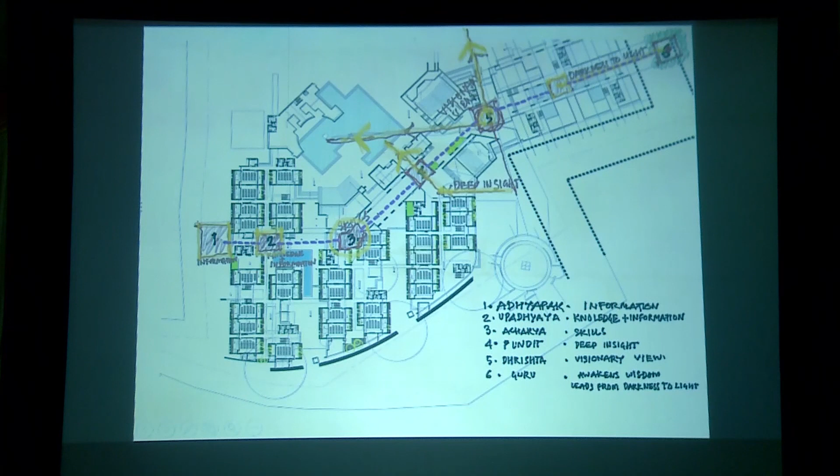So you go and discover this space and come into this library court - it's a feeling of discovery. This is about the vision, discovering that vision of climbing up and going into this. And then here, last, you go from darkness to light - this would be a slightly darker atrium, whereas this is under the trees as a larger thing. So this is like a symbolic progression.

And again, the sections - Lakshmikant has done this wonderful study of light from morning to evening, how it would move. And then there are a series of sections showing you the quality of light at different levels, which happens across the entire campus.

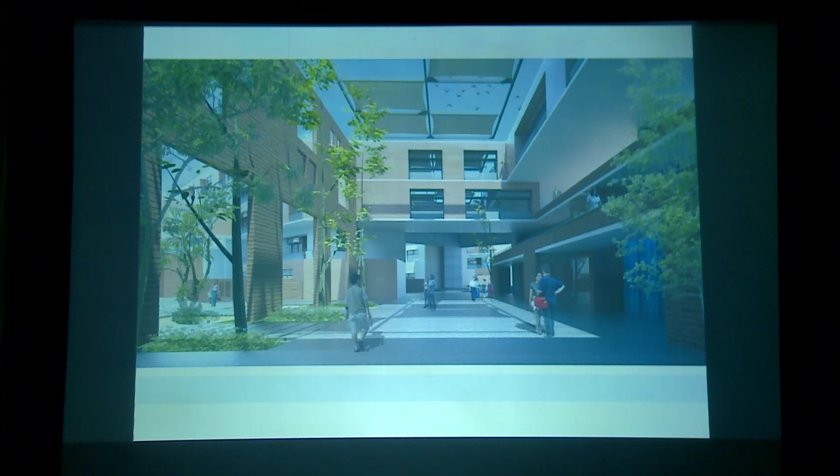So these would be with stone, and you have already seen that fast track, so it would look similar to that. But different volumes, different movements, different detailing.

We looked at people movement. Normally in 1 to 1.5 minutes, very leisurely, you can walk 100 meters. So within 3 minutes you can go from one end to another, right up to the center of the building.

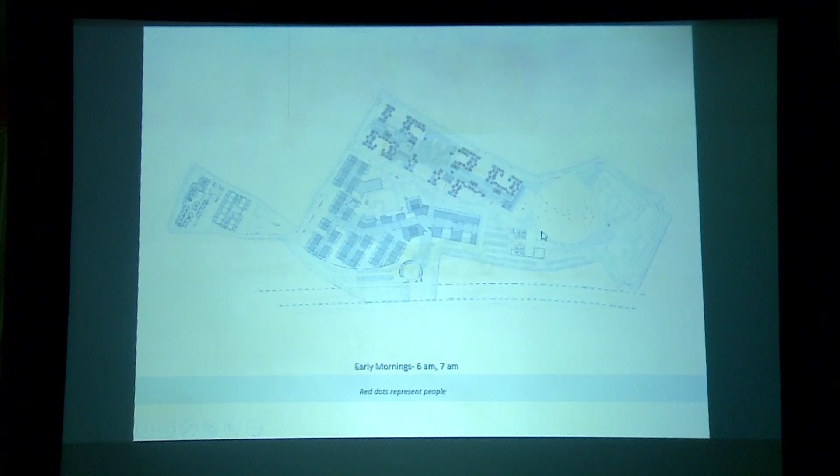The way - I don't know whether you can see those dots, but it really shows the occupancy. In the morning, 6 to 7 a.m., lots of students will be sleeping in their room. Some might be playing games in the morning, health conscious people. Some might be sitting next to the water playing flute or something. Then they will come down at about 8 o'clock for breakfast.

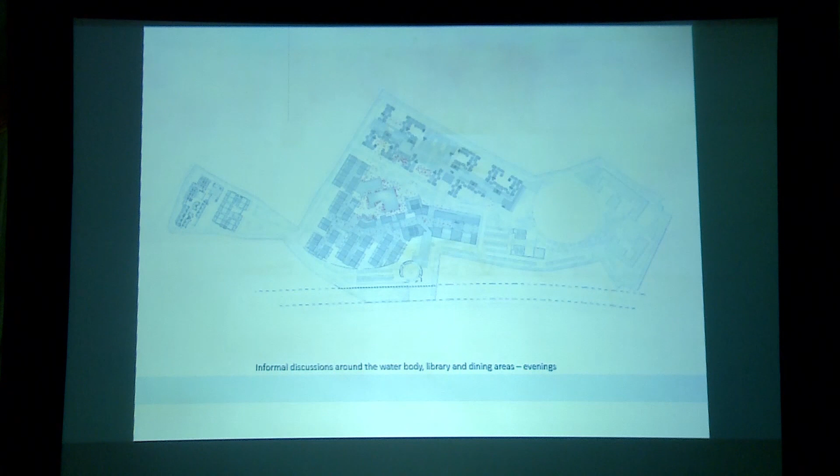So this will get populated. Then by 9 o'clock they are into their classroom, so this gets populated. During lunchtime they are all into this spine. Then in the evening they will start gathering around this library area, along this kund in the middle. They will start getting into these different courts where different playthings are. And in the night they are all playing under the floodlights.

Different games - so these are some of our projects where the transformation happens, the same space starts getting used in a different way when people occupy it. And we wanted that to happen.

Now this is a conference center, and if a Nobel laureate or somebody like Mr. Premji comes, there will be a large gathering of students. So whatever is happening inside the seminar hall will be projected outside, and sitting in the dining hall of the hostel, you can watch the same thing happening.

So this was one more thing - these are the open-to-sky terraces I talked about, and we created those all across. So whether you are on the hostel or in the academic block, you can walk on the second floor and everything gets connected. It's almost like an elevated ground level, which would have even the plants at the second floor level.

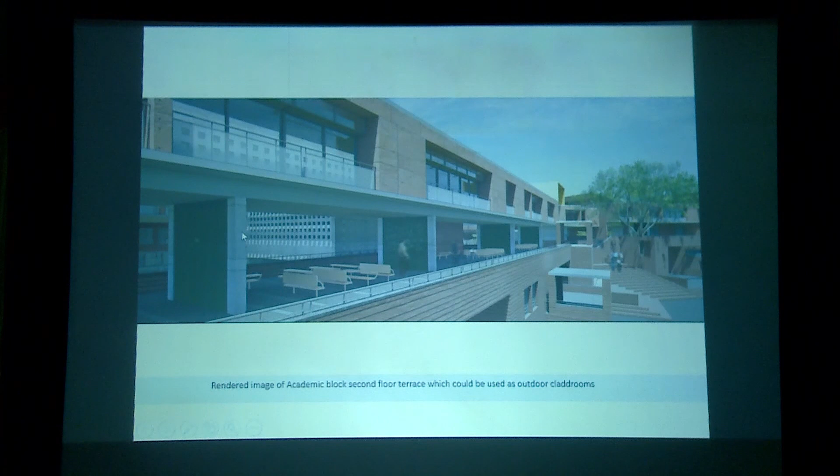And there will be a lot of these informal classrooms happening here, even on that second floor. Some studies of facade.

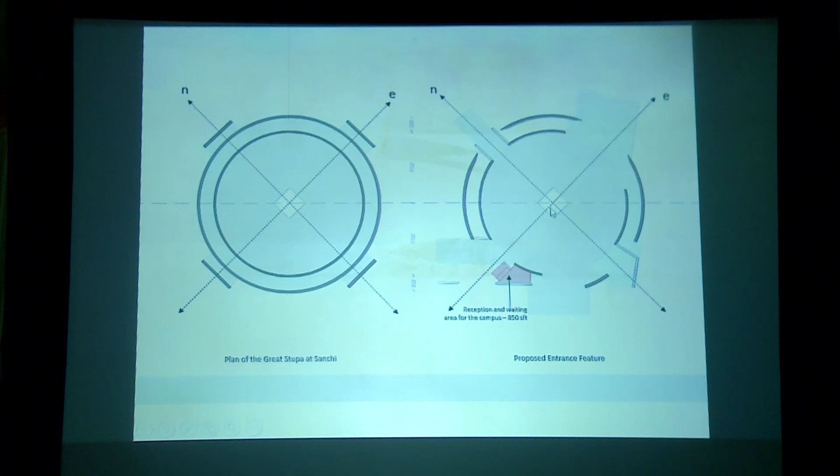This is the last thing about the rotunda. So we took clues from the principles of the stupa, and we literally took the dimensions, the major drawings, and the cardinal points. But though there is a spiritual content to it, we didn't want to connect it with spirituality. It's more about the feel of entering into an education place, and then you respond to the cardinal points.

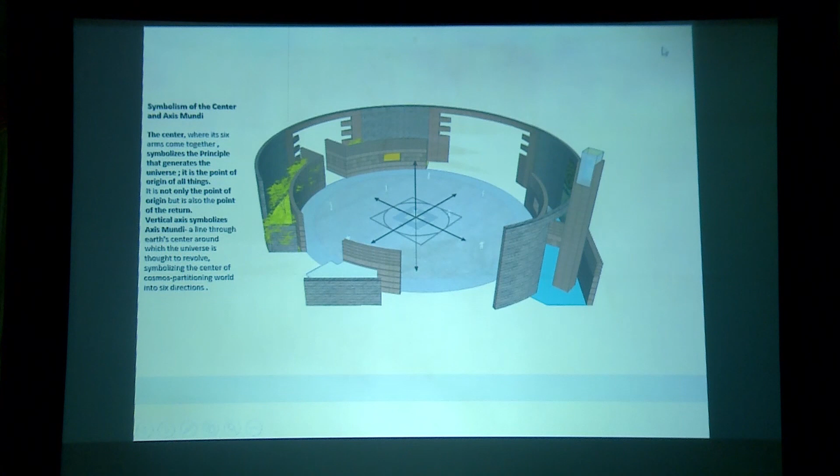The way the section looks is that these enclosures of the gateway are reflected as a layer. The famous gateway of that stupa, we took it as a punched-through element. So you have the normal stone, then a polished stone with a very sharp edge, and through the reference of the past, using the technology of the present, you are looking at a future, doing it in all cardinal directions. So you move through that. If you see, the stupa thing gets reflected there as a very polished, sharp edge, and you go through it.

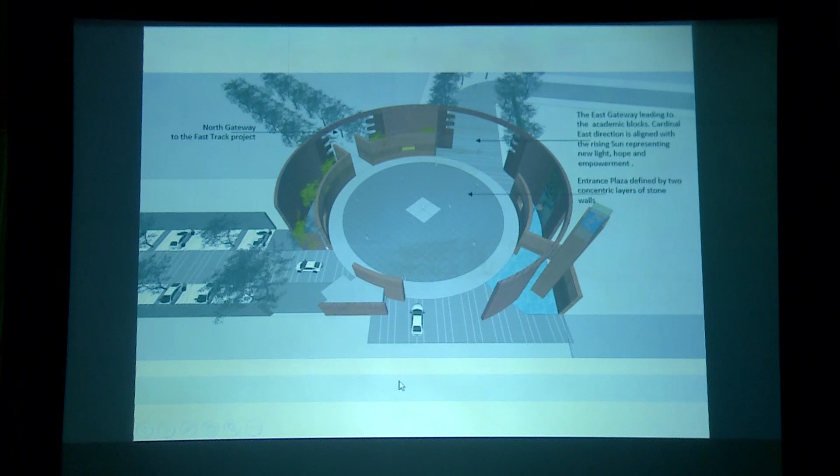It's the idea of the foundation, of incorporating or bringing common people into the thing. It's quite a large space where some of these festivities could happen, and which will be open to the public. So that's how it looks.

If anyone has any questions to ask, this is the time. Anybody? Someone raised their hand there. No questions? Speechless, huh? Speechless or confused... yeah, there's one.